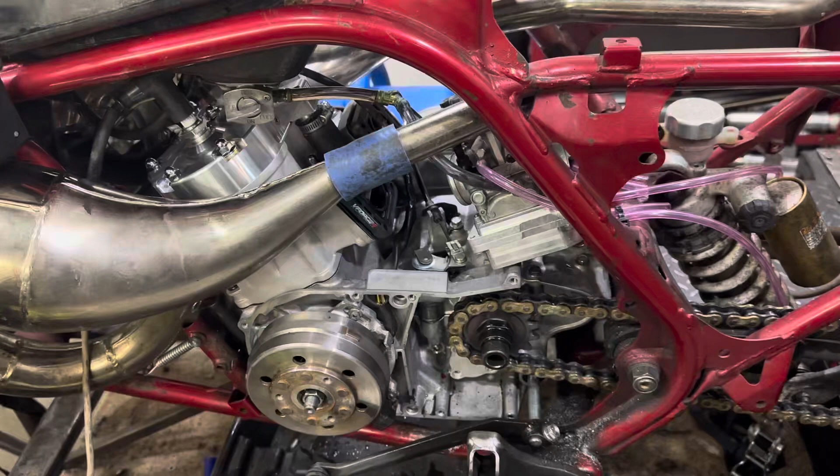Camo Redline here, doing a little testing on some intakes on this Banshee. It's a 10 mil, 66.25 bore cub. This is on race gas, 20cc domes, 192 degrees exhaust. It's a serval cylinder we did some porting on, 5 degrees timing, running Shearer small bore in-frames.

This is my dyno bike, so that's why it's such a disaster. So if you ship your motor in, your motor may be beautiful and it goes in this jalopy.

But small bore Shearers, 39 PWKs, 178 mains, 52 or 55 pilots, CEL needles in the 4th position.

Now, we did not change any jetting with these intakes. Yeah, you should go through and chase your jetting a little bit to get max, but this is just to show you what different intakes do to your power curve, where it's moving it and what kind of works. Here's all the intakes that we tested.

So we have UPPs here. These are kind of the standard ones. Softer boots, no grinding on them or anything. Just match right up to the V-Force 4s that we had in there. The V-Force 4s we had no modifications whatsoever. The customer has these intakes.

These would be a Mattoon machine intake. These have been around forever. Used lots of them. They do have a crossover, internal crossover you can kind of see in there. Have a little bullseye.

Good Mikuni boots, I like these Mikuni boots. These are the VM 36-200s because they're nice and soft. These are my favorite. I see less vibration in the carburetors with these Mikuni boots.

Got the Chariot intake, so their 39mm one crossover. Does have the crossover inside there. They have a little single bridge in there.

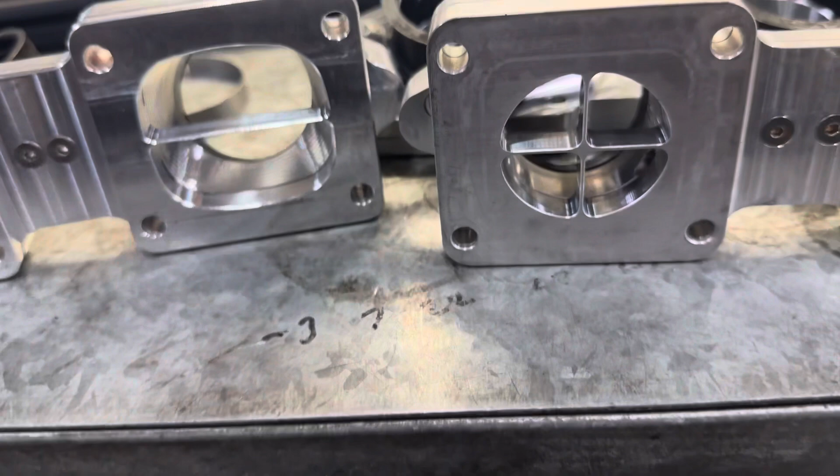Now with these ones, you take out the stuffer because you can see the difference between the Chariot on the left and the Mattoon on the right. Take the stuffer out, you have a lot of air right there. I'm not a huge fan of that because I feel you drop a lot of airspeed when you take that out for a 39mm carb or 41mm carb.

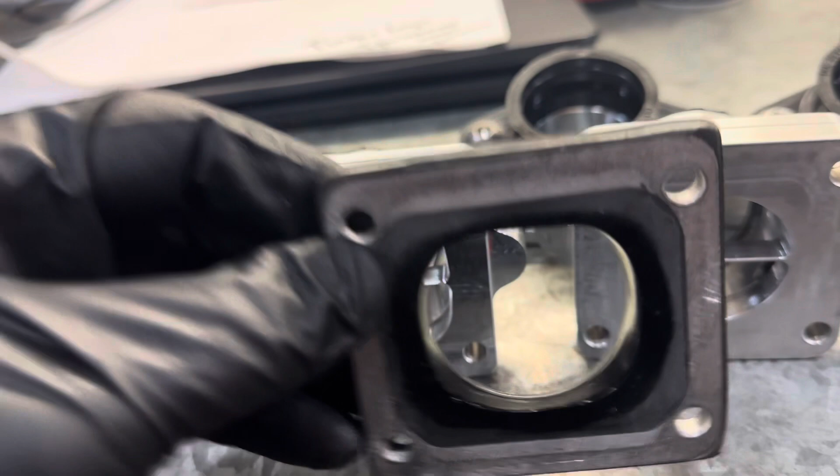You can see the PWK, not PWKs, but the UPPs. They're bigger, but they're still pretty small. These are our billet intakes. We match the size up to the V-Force 4 reeds.

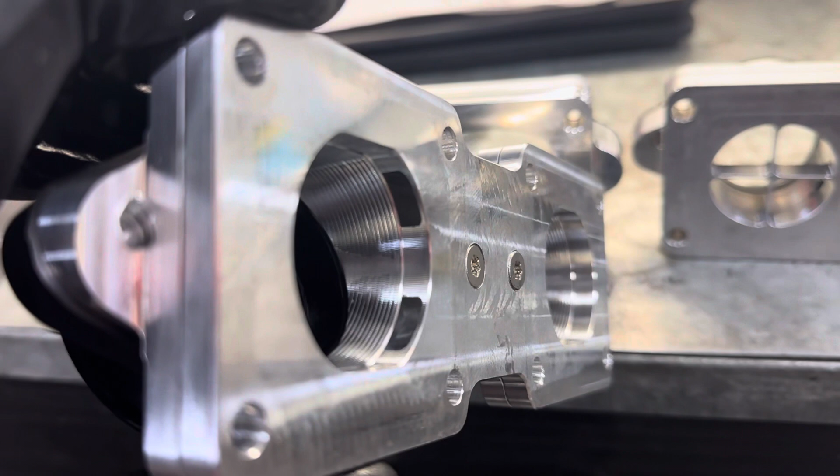Does have the crossover you can see there. I do like the crossover. I don't see any horsepower, but I do see a little throttle response with certain motors. Not every motor, but I tend to like it.

Just works good, same thing, we run the VM 36-200 intake boots because we like how soft they are. Underneath our boot though, we do have an O-ring that seals it.

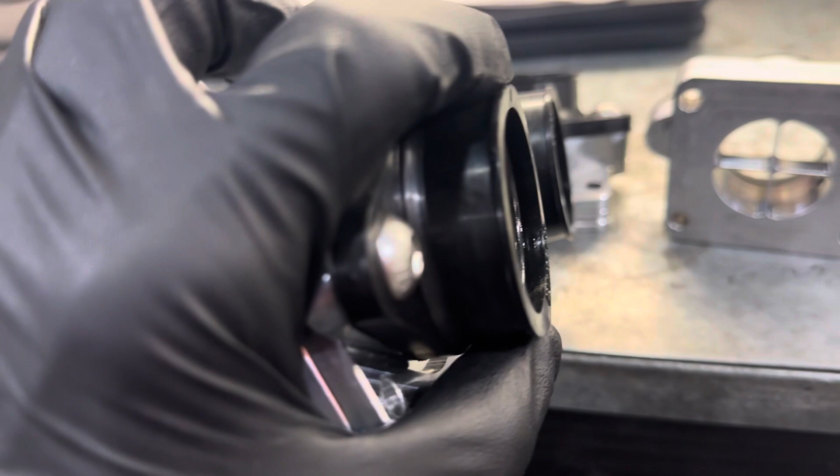These other two, we do have to silicone the boot to that because sometimes since you are holding your carburetor up with this, it starts to flex that boot down. That's a lot of weight on that boot. They're not made just to hold a carburetor up their whole life and bounce around. So we did put a big O-ring underneath ours to do that.

Other than that, it just matches up. Ours are a true 41, so they're a little big for a 39, but we bore a lot of these carbs out to alcohol and do it that way. So we made these more for the drag pipes, drag bikes that are running Shearer in-frames because they'll clear, or out of frames. So they work really good.

So those are the 4 intakes that we tested, all back to back to back. We let it cool down about 30 to 45 minutes in between each one and try them. Now here's the numbers.

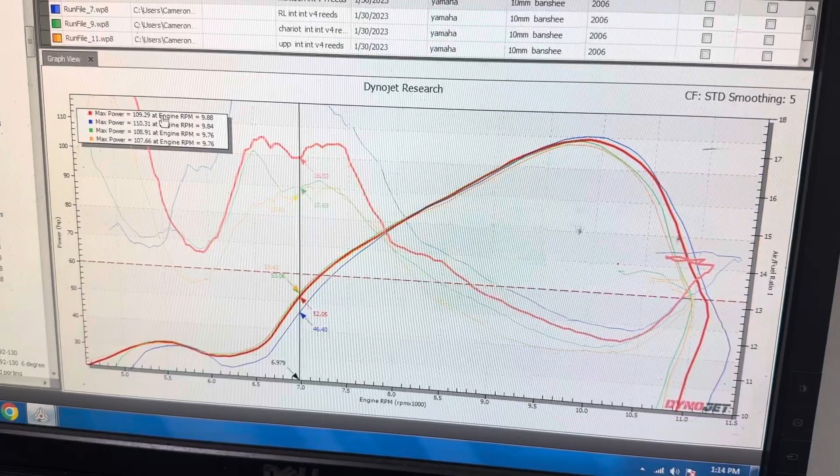Zoom in there. So on these ones, if I can hold this here, you can see the red one is what the customer has. It's 109.29 with the Mattoons. They worked really good. Actually, all the stuff up here too has the name and which ones they are. So the Mattoons are the red ones.

The blue one made more peak, but we did get killed on the bottom down there. But we did make it more for a drag intake, more for the upper end, so it does work really good there.

Next one down is the Chariot, the green one. Chariot did good off the bottom, lost the most on top though. As far as the billet intakes go, it only made 108.91.

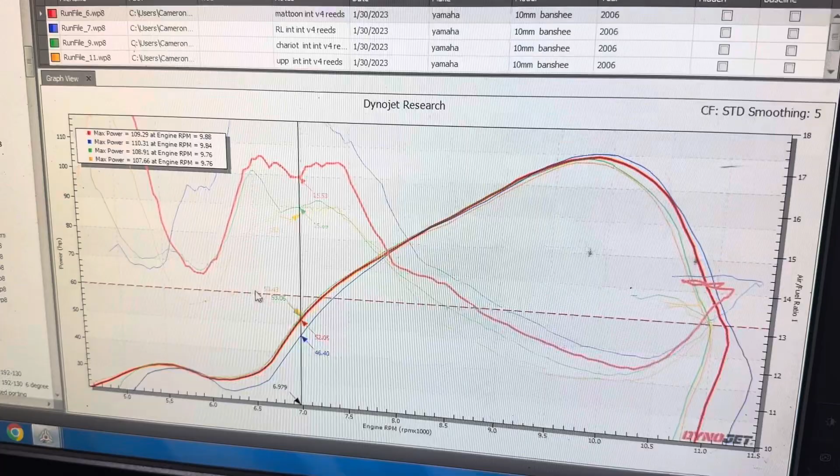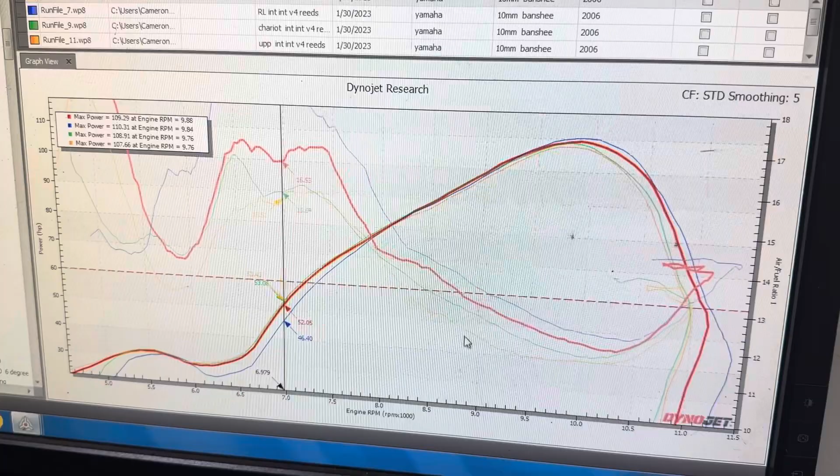And then the last one, the orange one, is the UPPs. They were 107.66. These are the air fuel curves, so you can see the difference in air fuel. Mine was the leanest, UPP was the richest, so you could definitely tweak those and bring them up or down a little bit. But it's interesting seeing just change an intake out, what it does to jetting and how it changes that.

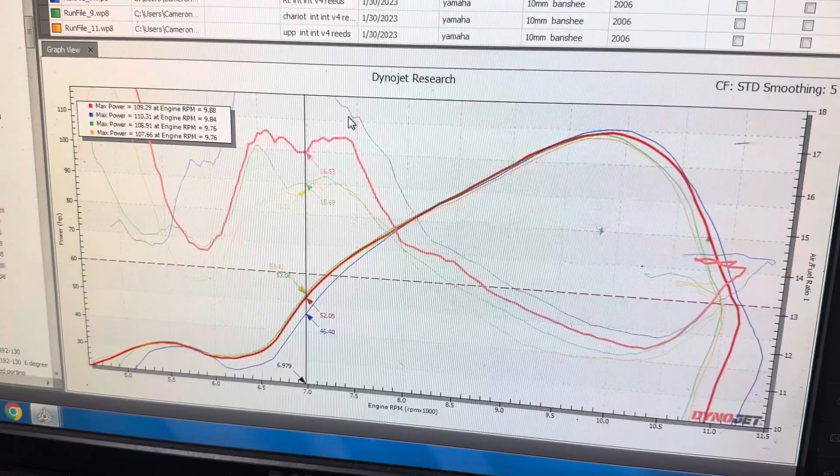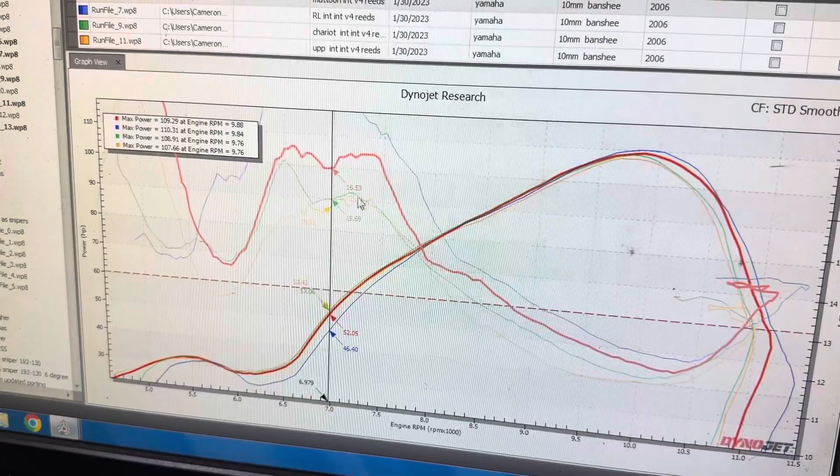With ours, I would probably like to jump the pilot jet up a little bit, probably the needle maybe a little bit. You could always take the main up if you wanted to bring it down, but you're always gonna have a lean spot on a 2-stroke with AFR readings because the pipe's just not working down here at 6,500, 7 grand. So that's kind of why you see that. I don't really pay any attention on AFR until 8, 9 grand, just a main jet change is all I do with it.

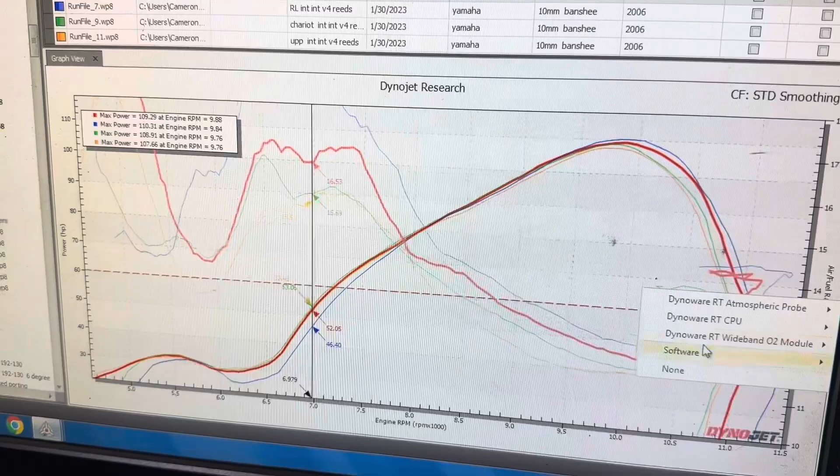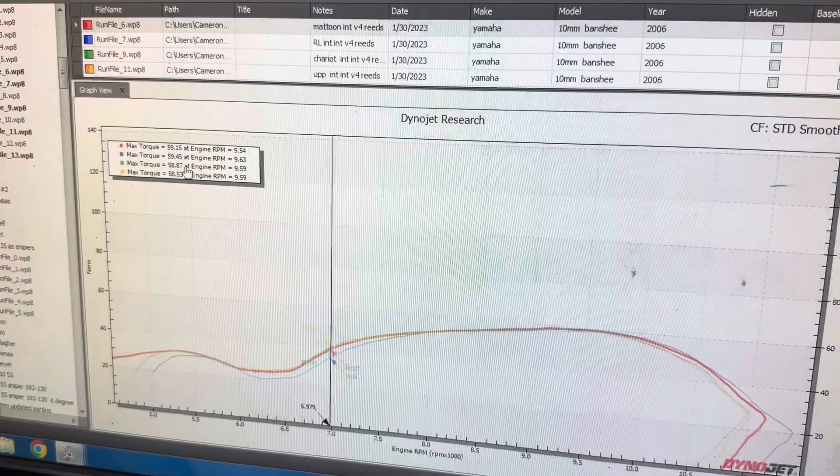If we go to torque, I'm gonna get rid of the horsepower now so you can see better. Torque side of things, go back up here. So the Mattoon's made 59, ours made 59.45. The Chariot's 58.87, and the UPP's 58.53.

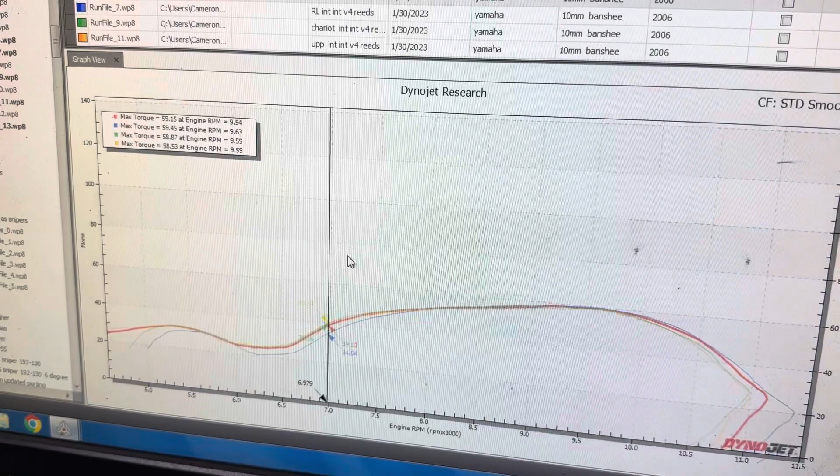They're all real similar. Like I said, ours lost the most on bottom there. Everyone else was about the same in the mid-range there. So ours had a little better over revs. So what you lose on ours there, you gain on top.

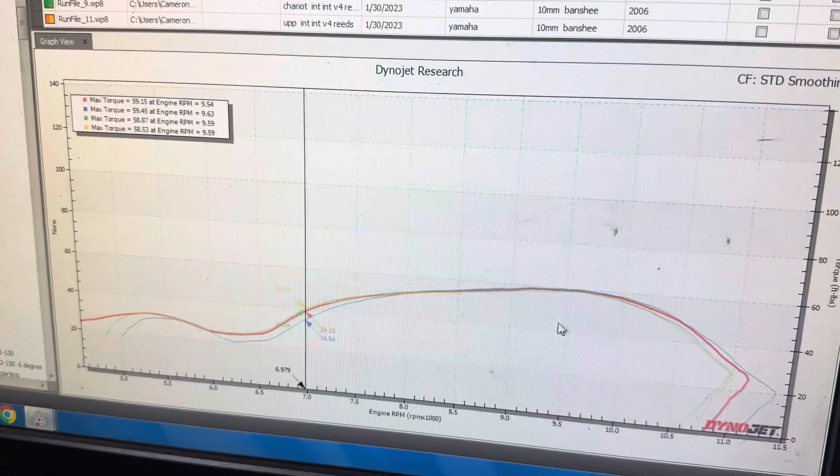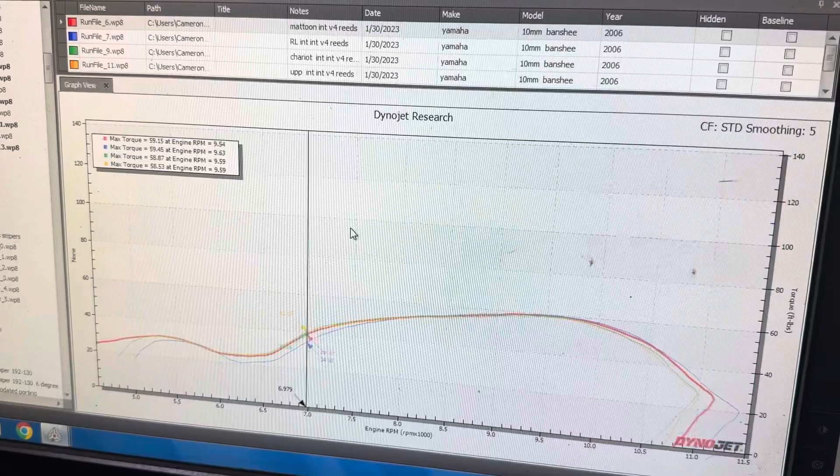I think for all-around riding, depending on what pipes you have, it'd be UPPs or the Mattoons. They're going to have the best throttle response for a 39. If I was going drag racing, I'd run mine or the Chariots. I'd obviously run mine, but those would be the two there. I think ours would make the most horsepower on a drag motor, especially on alcohol.

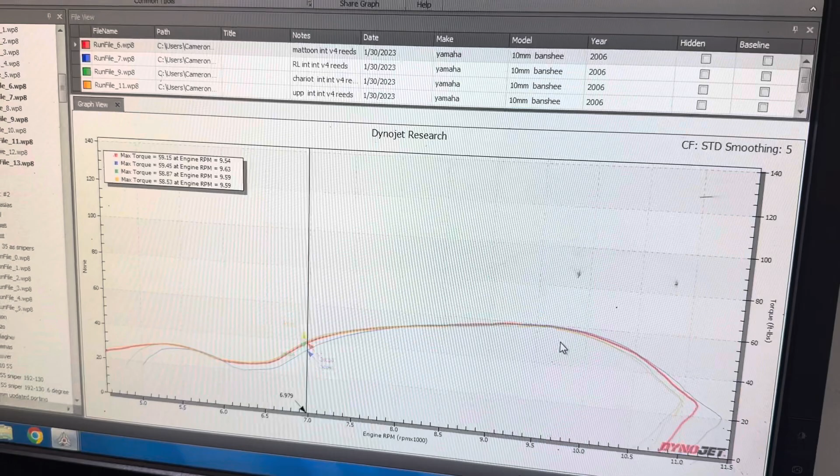You're not ever riding that bike down at 7,500 RPM, so who cares what it does there. Ours revved out better and did everything like that, but it was interesting to see how they all did. I was really surprised on some of them. Just a silly little intake, you know, can make a little bit of a difference.

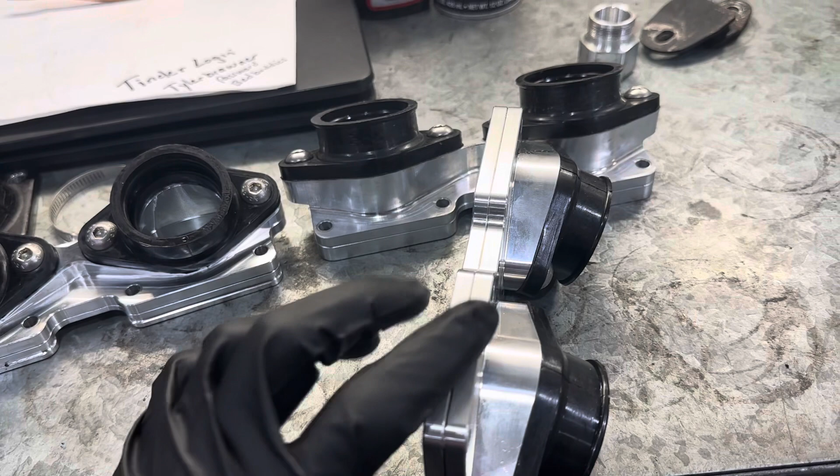The biggest thing you got to pay attention to, though, is pipes. Most of these billet ones don't clear very well with CPIs, because since they're billet and they have this crossover in there, it's pushing your intake up and back to get that intake in there. Where the UPPs, they're a lot thinner. You can fit most of these in there with CPIs.

So if you're gonna run them, you're better off to run UPPs with a lot of in-frame pipes, like CPIs, snipers - they're gonna clear better. T5s are gonna clear better, stuff like that. If you're running out-of-frames and everything, I honestly like the billet ones if you don't mind the little weight from the billet, because I like the soft intake boots.

On the dyno with alcohol motors, we'll see the carbs shake enough that we'll get some air in the power jet lines just because of the vibrations of the motor. So we will kind of play around with that. So just little thoughts there.

Like I said, I know I should have changed all the jets around, but I didn't have all that time today to do all that, and the customer's gonna run the Mattoon ones because that's what he had, and they worked really good on there. So hope you liked it. Thanks.